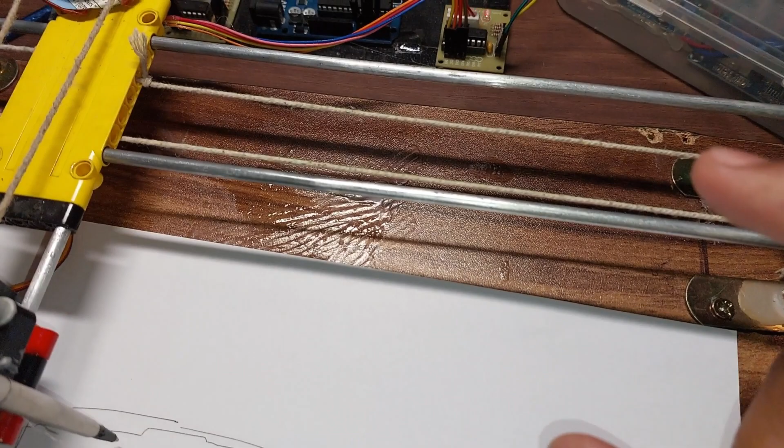Now if you are wondering, I said no aluminum rails, so what are these, you might ask. Actually these are just some aluminum rods. The way I extracted these rods is actually from aluminum clothes hangers. Basically I took them, I bent them up, and these are the long bottom bits where you hang the clothes, these two rods. And these two rods here are actually the sides of them.

So I actually took two hangers and I cut them at the bottom. So these are those two hangers, and these are the two sides. So the little curved bit on the side which connects the whole thing, that triangle bit, that's this bit here that you see.

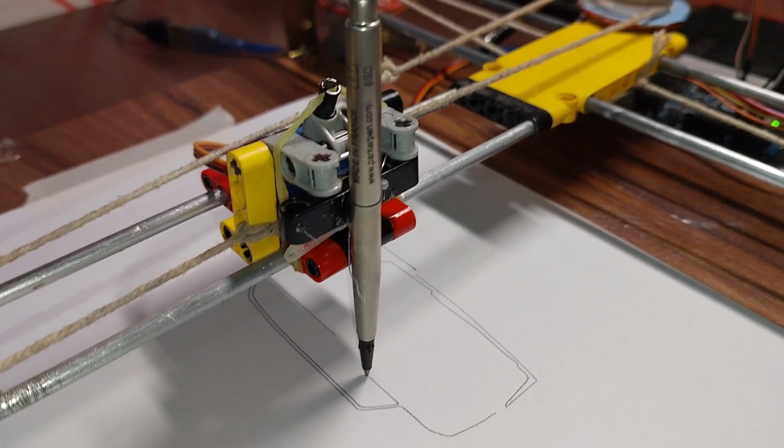Now for the actual platform, I have this Lego piece here. This is just a Lego flat piece, and what I found is the rails from my hangers fit perfectly into the holes of these Legos, so it's almost like it's sliding on it. As you can see, it works perfectly like that. Same here, I have another one on this side.

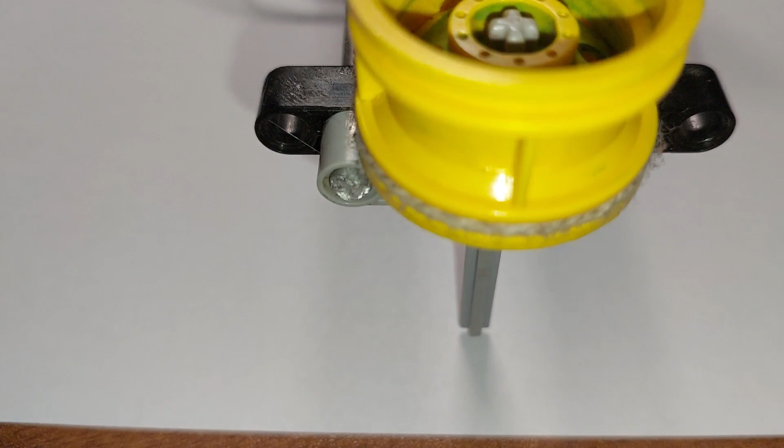What I did, I just took these little rails and I kind of mangled the ends of them a little bit so that they became a bit jagged, and then I just friction fit them onto the piece, and then I put another piece on to clamp it in, and then just put a tad bit of super glue in there to finally finish them off. Same with this side.

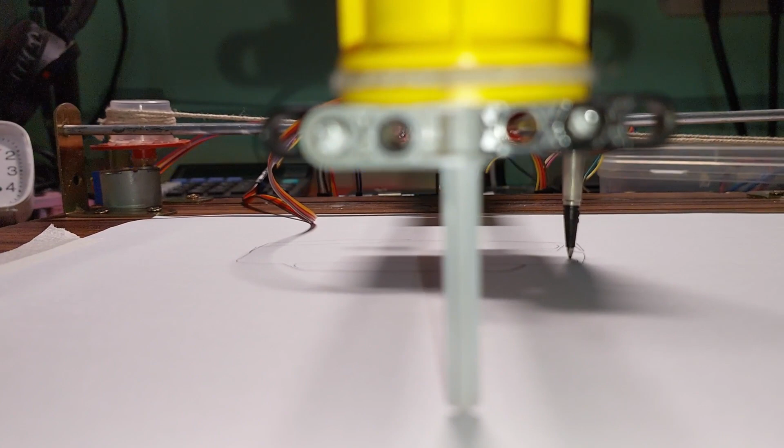Now on this side you also need an extra pulley type system. So what I have is this end here. As you can see, the rods end up here, and onto them I have attached this little piece of Lego, if the camera focuses there. Now what you need is a little bit of a support. So as you can see here, I have this long Lego post.

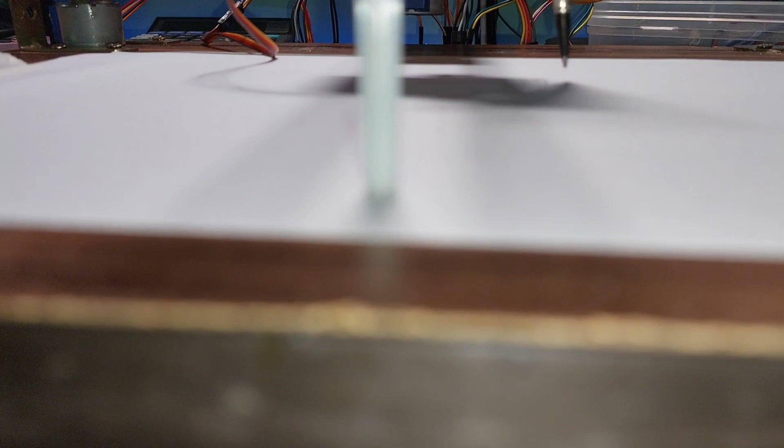The way it should be is that when the pen is plotting, as you can see, it should just slightly be above. But when the servo pushes the pen up, you want it to just touch so that it supports it, as you can see here, so the platform doesn't completely bend down and the pen ends up actually touching it again.

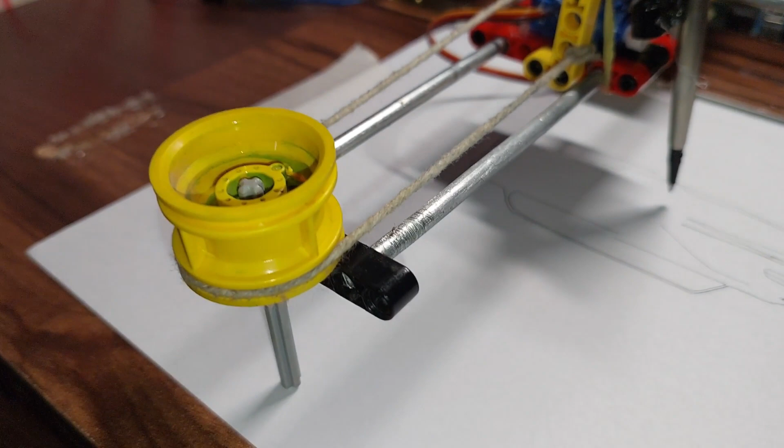So for the platform, you want a little pulley type system. Ideally this would be rotating on a bearing or something to allow this bit of string here to just move, but I couldn't find something that would work, so I just ended up doing it like this. As you can see, this string goes to this platform. This is the main plotting platform.

The way it works is it's also just a few pieces of Lego that are fitted onto these rails. And onto them there are two L bracket type things, these bent up L's on both sides, this side as well as this side. And basically I have this pulley thing. If you're wondering what these are, this is just a BO wheel.

So if you know those little cheap BO wheels you can buy for small motors, what I did, I took the part where you're supposed to put the BO motor in, those little yellow BO motors you find. That bit, if you see, will almost resemble the shape of the stepper motor's prongs, but it doesn't fit perfectly.

So what I did, I just took a little bit of a hot soldering iron basically, and I just slightly removed it so that it fits almost perfectly, friction fit it on, and then I just put a little bit of super glue in to fix it in.

And this bit here is actually the cap of a medicine bottle. So if you buy one of those liquid medicine bottles, for example, you'll find these caps that go on top of it that give you the measure to see how much of the liquid you are taking out. So that's just two of those fitted onto these.

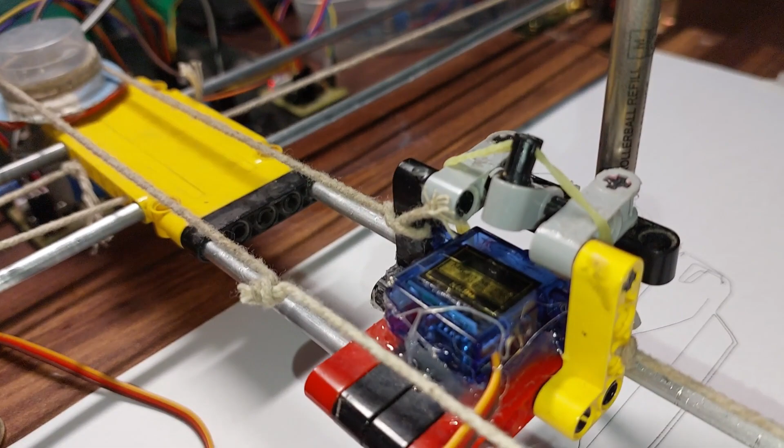And then basically the way it is done is that over here this one has this string roped onto it. This side is attached directly onto the platform, as you can see there. The other side moves around, goes around the pulley, and then attaches on this side, so it can then pull it back and forth.

For the pen mechanism, I have a servo there, as you can see. That servo is pushing this little jig here. So the way it is, one side is this cross, the plus, and then the other side is the Lego connector bit, this bit here. So I have those two connected to this piece of Lego here, so it can swivel

up and down a little, and then I have attached this straight piece here, which is just super hot glued onto the pen, and the servo basically pushes it up to push the pen out of the way when it doesn't want it to plot. And when it wants to plot, it will just have this rubber band, as you can see, that pulls the pen down and pushes the pen to the paper, so it can then plot it successfully.

Now I moved it a bit, so this print is not perfect, because I was moving it around, so it just vibrated a little bit here and there. But other than that, this side rail, let's talk about that. So I have these two L brackets. These are standard L-shaped brackets.

So I just shoved these rods into them on both sides, and then I made sure that I put one of them in roughly straight with respect to this board here. This is just a piece of wood I have stuck everything onto. So I put one in, put this thing in, and then I put the second rod in, and I basically attached one screw onto one of these posts a little tightly, and then I just wiggled the other end around.

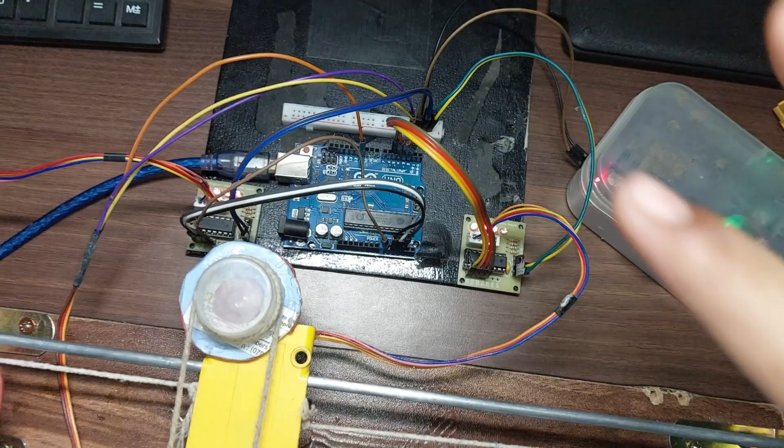Now let's talk about the electronics. The electronics for this is quite simple, obviously, just two steppers and a servo motor connected. So you have the Arduino Uno. Now the x-axis, which is going to be on this one here, goes into pins 2, 3, 4 and 5, and then the y-axis goes to A0, A1, A2 and A3. So these are the 4 pins it goes into.

Now what I want you to do is just put them in whichever orientation you feel like, and then we can test it later. If it's the correct side, then we can say okay, it's good. Otherwise we can just take the pin out, flip the whole thing and put it back in, so it will reverse the way it moves.

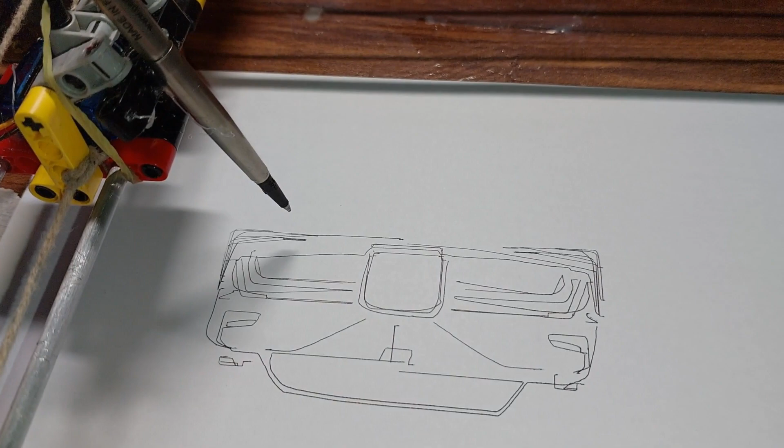But yeah, as you can see, it's done printing this. It's just printing this bit here. You can see it moved a little bit because of me shaking it around and colliding with it a little bit here and there.

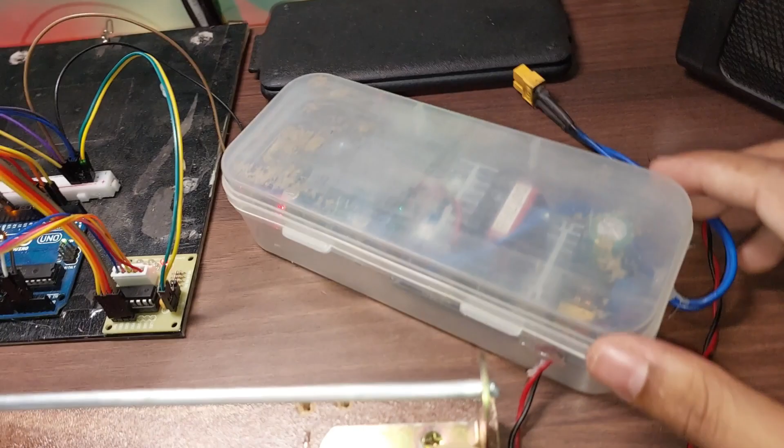The servo goes on to pin number 11, by the way, and everything else is just powered via 5 volts. So this is a 5 volt rail. This side's also got this yellow bit going into this breadboard power rail, and it's going into my custom power supply. This power supply I've used in quite a few of my previous videos. It's just a custom thing I built.

All it has is a 240 volt to 12 volt 6 volt DC step-down converter here, as well as an AC to DC full bridge rectifier. And then I have this bit here. For 12 volt power I just have it directly connected to this terminal here, which gives me 12 volt power onto this bit.

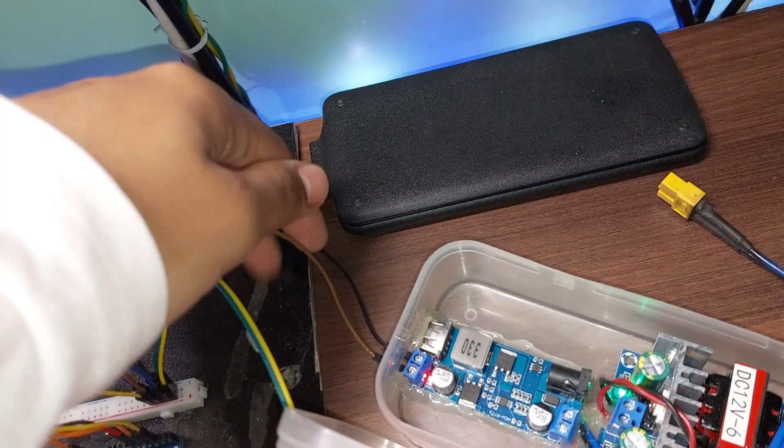And then for 5 volt power I have this 5 volt 5 amp constant current regulator. That bit gives me 5 volts up to 5 amps out from here onto this. As you can see, I have these two jumper wires going into the breadboard. So that's the power supply powering the whole thing.

Now obviously you will need to improvise a little if you don't have something quite similar, so you might not have these hangers or something like that. But yeah, that's basically it for physically building the thing. I'll now switch over to the computer and show you the software in complete detail.

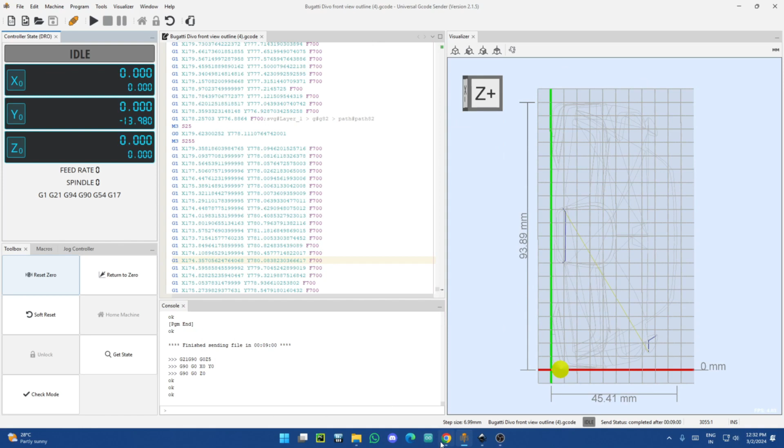Okay, as you can see, I have switched over to the computer now. This is the software running on it, so we'll go through this first. In the description you'll find a zip folder of this. If you open it up, you will see these few folders in it. First of all, go over here to this bit. This is the library that's running on the Arduino.

This is actually the Grbl library, but it has been converted. The original Grbl library uses NEMA 17 bipolar motors. We are using 28BYJ, which are unipolar motors. So this has been converted to run these, and the servo bit is also not in the original Grbl code, so these were done separately. You can download it online if you search up 28BYJ servo Grbl.

That one has a bit of an issue, because while converting it, they actually made a problem in this file here. If you download it online and open up this stepper one, you'll see, if I find it, the stepper.c, cannot find it for some reason here. There it is.

Anyways, if you open up this stepper.c in the one you just downloaded, you'll find that over here this line is commented, there will be two slashes here, which is not supposed to be there. That was a mistake made on this updated folder. This causes it to not compile and gives an error. So I have fixed this here. If you download it from the description now and run it, it should work.

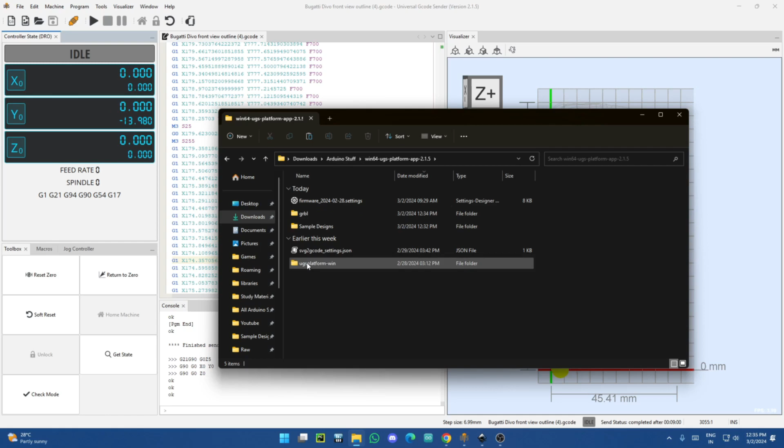You can now go back here, and over here you'll find one more thing. You'll find this file here. This is actually Universal G-code Sender; as you can see, I have it running in the background here, so I'll just go ahead and close it. You can go over here, go to the bin and open this thing up. Once it's done loading, you can open it up.

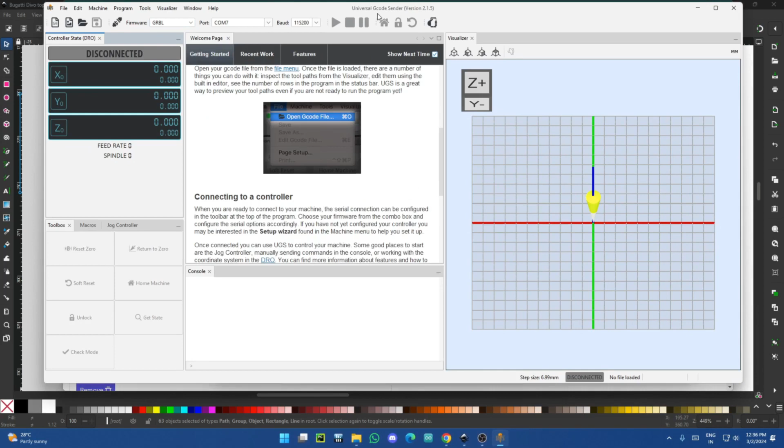Now you'll close this, and over here you want to go to this machine menu and go to setup wizard. Now here you just have to change your COM port. As you can see, mine's on COM 7. So you can click connect here. It will automatically do its thing and connect to the Arduino directly. Now this only works on the Arduino Uno. For some reason it doesn't work on the Mega. I have tried it, but your mileage may vary, I do not know.

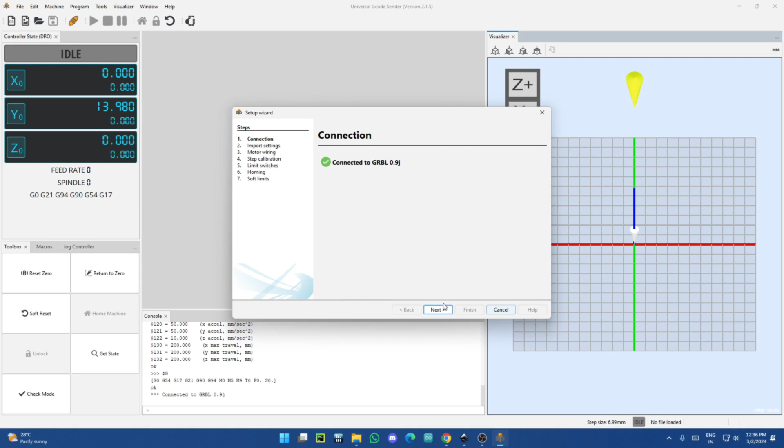Anyways, moving down here, you can come over here, go to open settings file. In the downloaded bit, you'll find this firmware 2024 file. This is the settings file. You want to open this, and you'll find this here. You want to click here, import, click next.

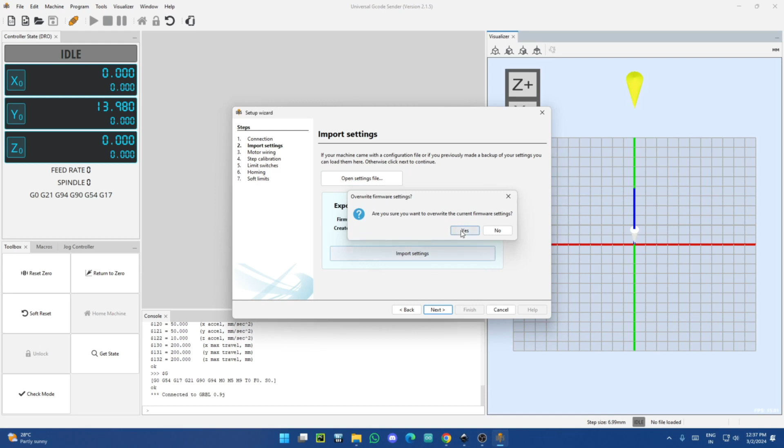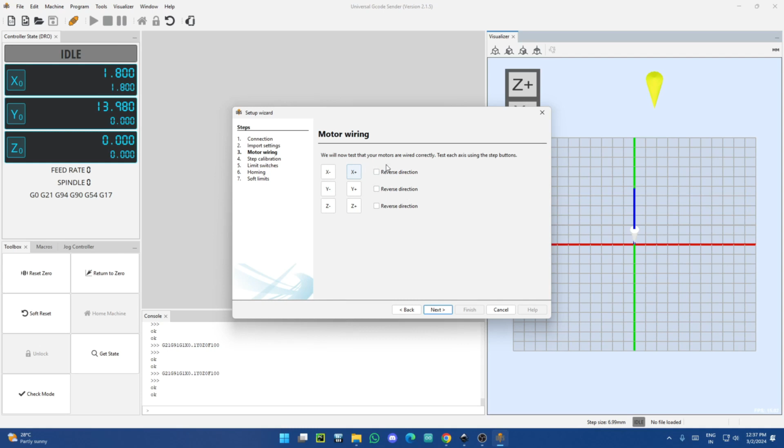Now this is where you'll test it, so just go ahead and do plus and minus and see what your thing is actually doing, whether or not it's correctly moving in the plus and minus direction. If it is moving correctly, you are good. Otherwise, as I said, just reverse the pins physically. This reverse direction setting just doesn't work for some reason. Just physically reverse the pins and you should be good.

Then click next. Here you want to grab a scale and click this plus bit here. You'll see it's moving. As you can see, it's moving 1 millimeter. Now I just want to hit that and see what it's actually moving in real life. After checking what it's moving in millimeters, you can just put that value here and click update.

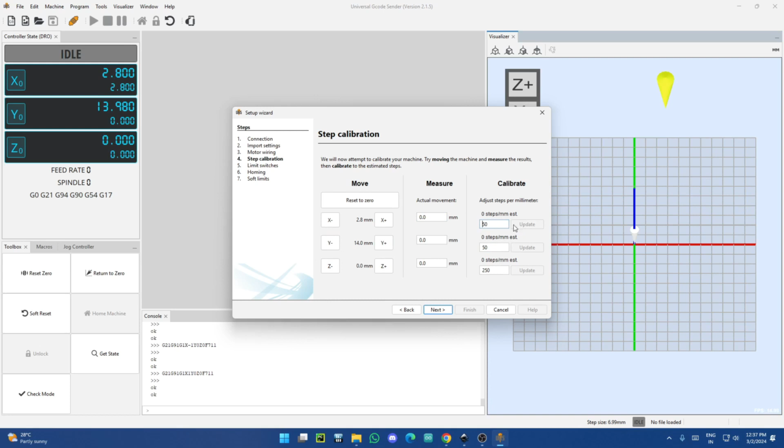Z-axis doesn't matter, we don't have a Z-axis. After that, we don't have limit switches or homing or soft limits, so we can just click finish, and that's basically it. Now you'll be left with a window looking something like this. Over here you'll have this toolbox. This is what you are going to use to set to 0 and return to 0.

So once you have made it to its 0 position, you can click this bit and set the current position as 0. Over here you can go to the jog controller and physically move it. Here you can change how much you want it to move with one click of the button. So if you do something like this, you can click plus X and it will move that much. You can control it and see if it's doing as you like.

Now once you're done playing around with it for a bit, you can go over here, click this, and this is where you'll upload your G-code.

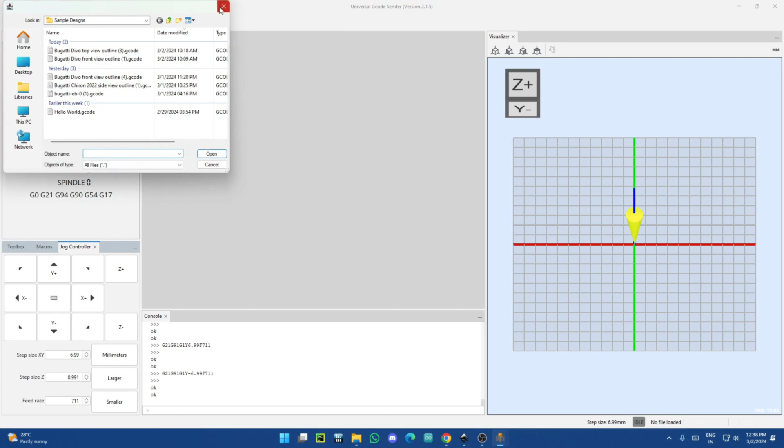Now don't worry, you're supposed to use an SVG, I know, but these are some sample G codes that I have provided that you can use. But if you don't want to use these, you will do this here. So first of all, you want to use Inkscape. You can just download Inkscape and then open up your SVG as you can see here.

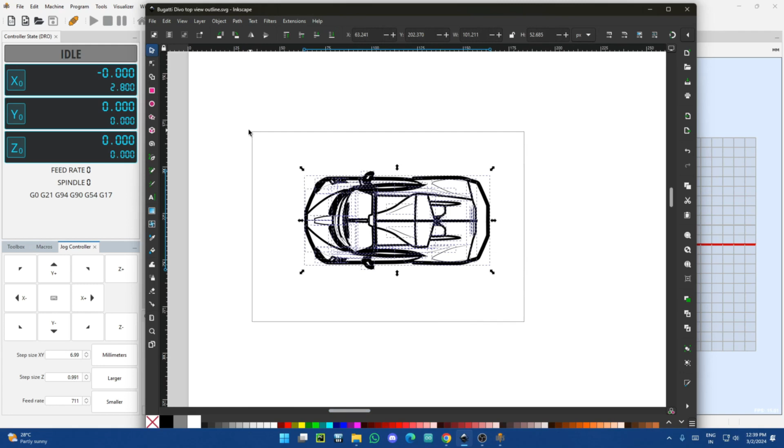Now once you have opened up your SVG, you can make your changes. If you have an image that you want to get traced, just open the image here, go to Path, click Trace Bitmap, and then here click Apply. So that will make the SVG out of the image. Now once you have gotten your SVG file satisfactorily, you want to come over here, hit save. That will save your SVG.

Once you're done with that, you'll go to this website here. This will also be linked there. This is going to convert your SVG to a G code. So you want to choose files, choose your SVG file. Once you have done that, as you can see, I have it open. You want to click settings here and click import, choose the file. Same thing, in the description you'll find this one. Open this and you can go ahead and click save.

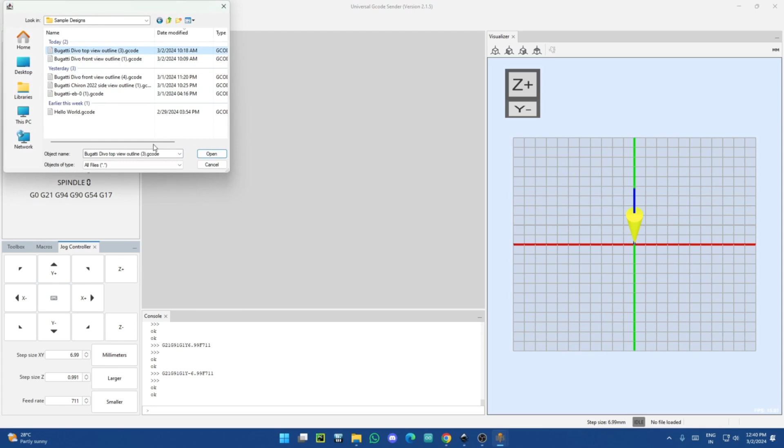Now in settings, you'll find something similar to this, as you can see here. You can go ahead and close this, click this generate G code button, and you'll then get a G code instead of the SVG you had before. So as you can see, these are the XYZ coordinates of the thing. Now once you're done with that, you want to come over here, hit this, go to sample designs, or you can open your G code, just click open, and it will open up the G code like here. You can see it on the visualizer.

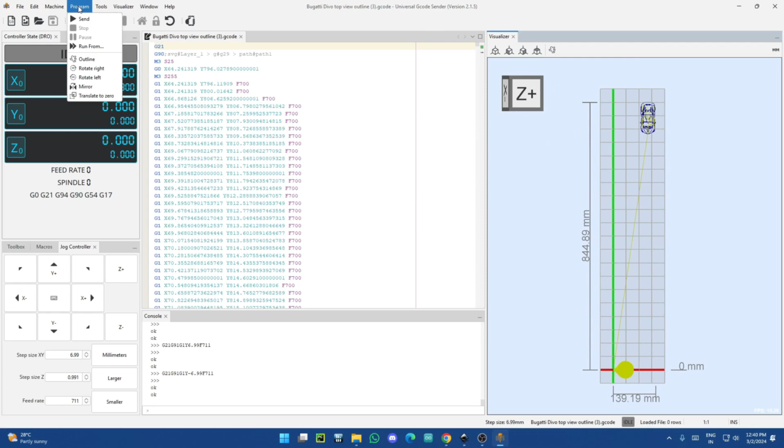Now sometimes it does this bit where it's actually not centered to the 0. So what you want to do is come over here to program, go ahead and rotate it, because my Y axis is the long axis, X is the smaller axis, and then I'll click here translate to 0. So this will bring it closer, and over here you can see the dimension. So you can see this would be printed as 5 centimeters wide and 100 millimeters or 10 centimeters wide.

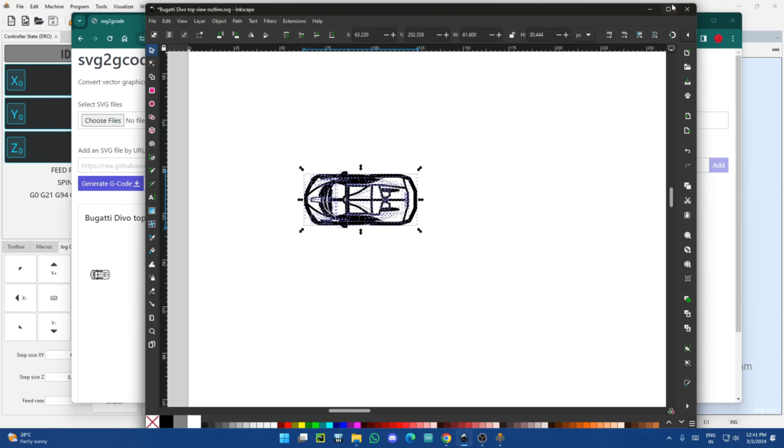And if this is bigger than what your machine can actually do, you just come over here to Inkscape, select the whole thing, make it a bit smaller, click save, and then regenerate the G code, and it will make it physically smaller here. Once you are happy with the position as well as the size of it, you can then come over here, click this button here. This will start the code, and it will automatically do everything. So it will follow the path, it will pull up the servo.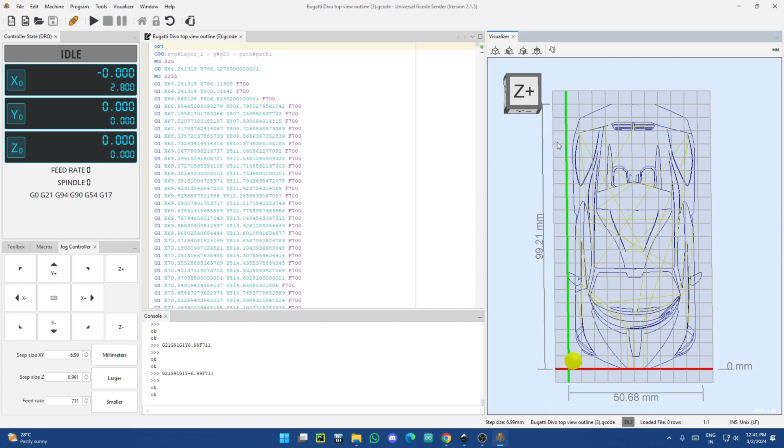Another thing, I forgot to mention the servo itself. Now over here, if you go to settings, you'll find tool off sequence and tool on sequence. This is setting the servo angles basically. In Grbl, the way it's set, 0 to 255 is actually your 0 to 180 of the servo scale. So in my case, 255 is the pen fully down, and 25 is the pen fully up. So that's what I have set up here. You might want to change this.

To do this, you copy this bit here, hit copy, and then come over here to console. You can just Control V, paste it. Once you have pasted it, you can play around with the angle a bit and see which angle makes the pen fully up from the paper, and which angle makes the pen down on the paper. Then put this here in the tool off and tool on sequence, save it, click export and download the new file, and then you can convert the SVGs to G code, put them here and run the code.

So yeah, that's basically it for today.